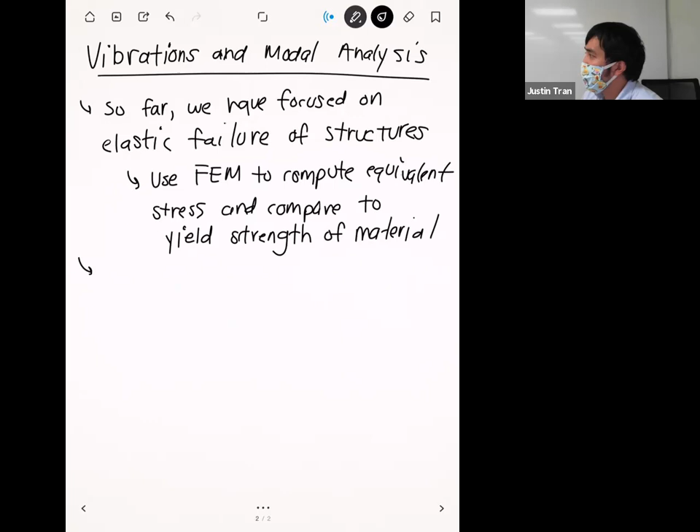And so we've done this in both a static configuration, which is what we've focused mostly on. We've also done a little bit of dynamics as well. Okay. But this isn't the only failure mode for a structure, right? A structure can fail in other ways beyond this. And so one of the ways where a structure can fail, which is a prime concern for any kind of structural design, is resonant vibrations. Okay.

Right. And so the whole idea with resonant vibrations is that every single object, if it has a physical form, has what's known as a natural frequency. Okay. If you take this natural frequency, and if you excite, what we typically call it, if you excite the structure at this natural frequency, okay.

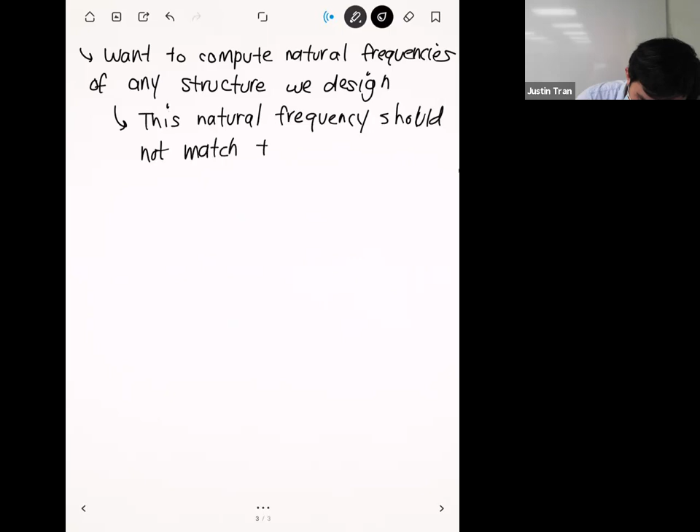Okay. And a lot of times, you're going to be able to compute the frequencies of your loadings fairly easily. As an example, let's say that you're designing a bridge, right? A bridge which is designed for people to walk over. And if you're going to have a fairly decent amount of foot traffic, one frequency that you can avoid designing around is the frequency at which people normally walk. Okay.

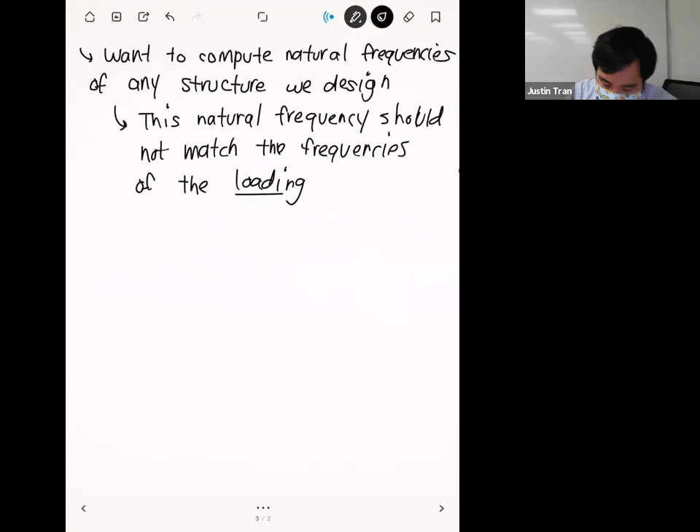So this is a very common one if you're designing any kind of structure. Okay. And so another example is the building that we're standing in right now, right? So people are going to be walking around this building quite a bit. Okay.

And so if you were the designer of this building, you want to make it so that if everyone was basically walking up and down the hall at a particular frequency, this should not match the natural frequency of your building. Okay. Because if you do, then the building is going to fall apart just by people walking up and down the hallway, which is what you don't want.

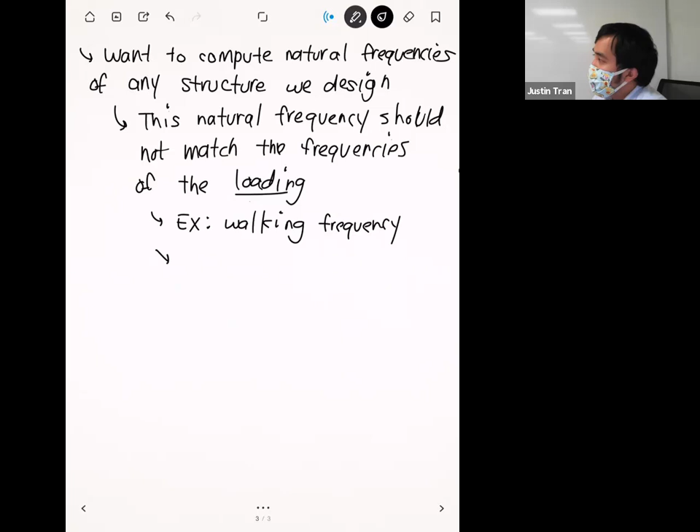Okay. Right. So typically, I say here that the natural frequency shouldn't match these loading frequencies, but in reality, the way that designers avoid this is they try to design their structure such that the natural frequencies are way higher than their loading frequencies. Okay.

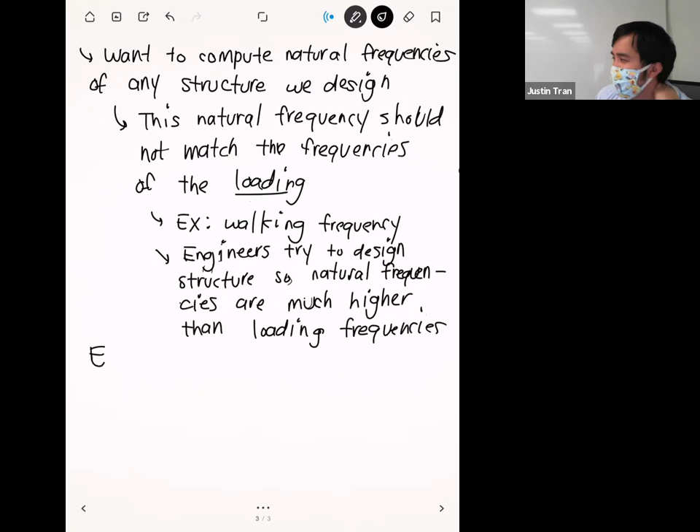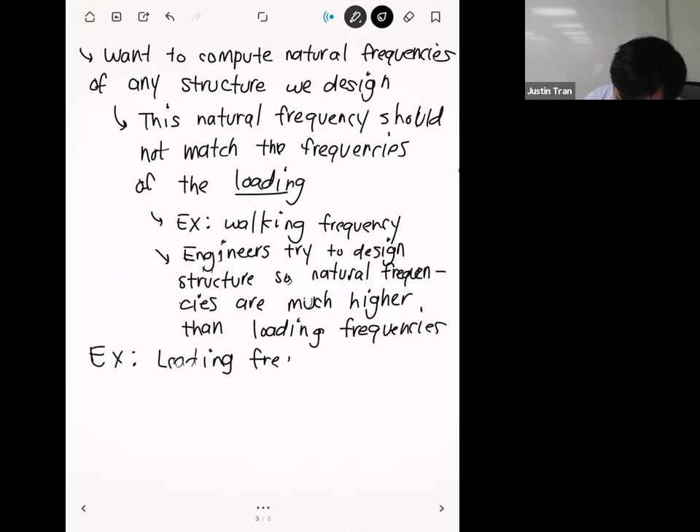And so let's say that the walking frequency is maybe around 2 hertz, okay? Average, because people walk at different paces, but on average, let's say that we have a frequency about 2 hertz, okay? Ideally, let's say that you're designing a building, and so the natural frequency of this building, I would say, has to be at least 10, okay?

Because obviously you don't want it to be 2, and you don't want it to be anywhere close to 2 as well, because things might happen where maybe someone runs down the hall and then they're stepping at a higher pace, okay? And so you don't want to be anywhere near that. And so there should be a decent factor of safety involved here to make sure that you're never going to be around that case. Okay.

All right. And so, of course, the key to this whole operation is being able to compute what the natural frequency of your structure is. Okay. But unfortunately, this is much easier said than done, because it depends on a lot of properties of your structure. It depends on its material, it depends on its geometry. To a certain degree, it also depends on its loading as well. And so this is normally not something that you can do by hand.

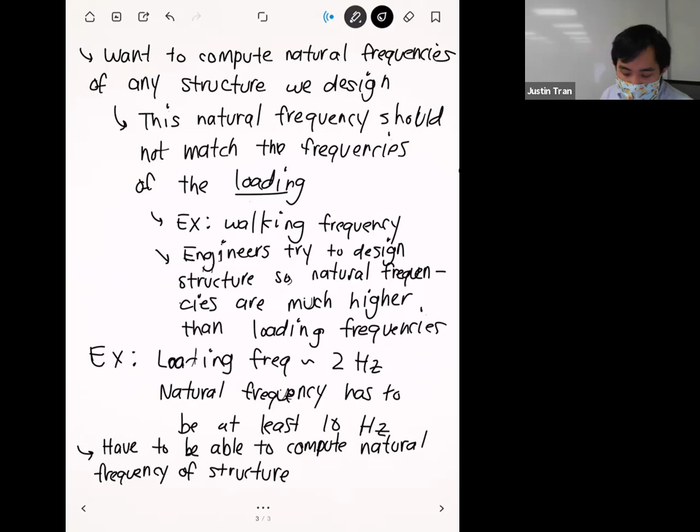Yeah. So if something like this is so difficult and challenging that we have to use computer software, how did they do it before? Did they just take weeks and weeks to get it done?

So before, even though it's hard, it's really hard to get an exact number. You can do some decent estimates based on whatever material you're using and the rough size of the building. A lot of times these numbers depend on certain critical dimensions, like what is the thickness of the wall at this location. And with lots of experience, they were able to get a good estimate. It wouldn't be exactly perfect, but usually good enough to do computations like this.

And they would do a lot more scale testing too. So they probably wouldn't build an entire big building, but they would make a small scale one and then test their designs that way too. Yeah.

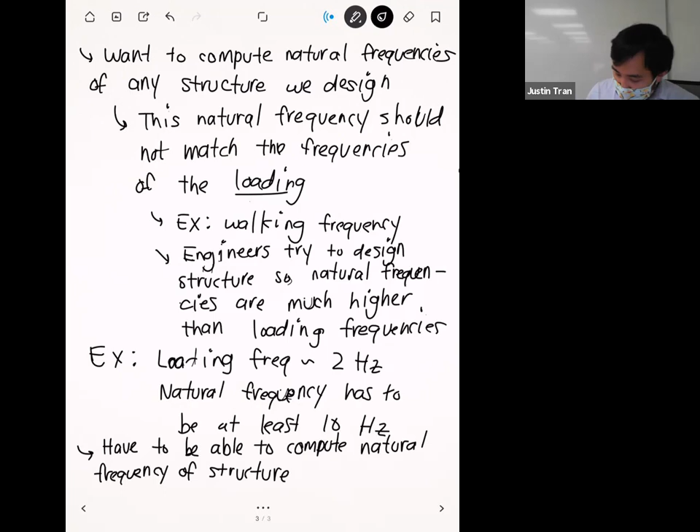Okay. All right. So let's talk about some of the theory behind resonance. Let's start with one of the simplest cases, which is a string in tension. All right. And so we're going to look at what is basically a guitar string. We have a string that's going to be fixed to a wall on one end.

And on the other end, we're going to be supplying a tensile force. Okay. And so the string is going to be pulled tight, right? So imagine exactly a guitar string. And in addition to the tension in the string, we also know its length. We'll say that the length is L. And we also know mu, which is its density, but it's given in terms of mass per length.

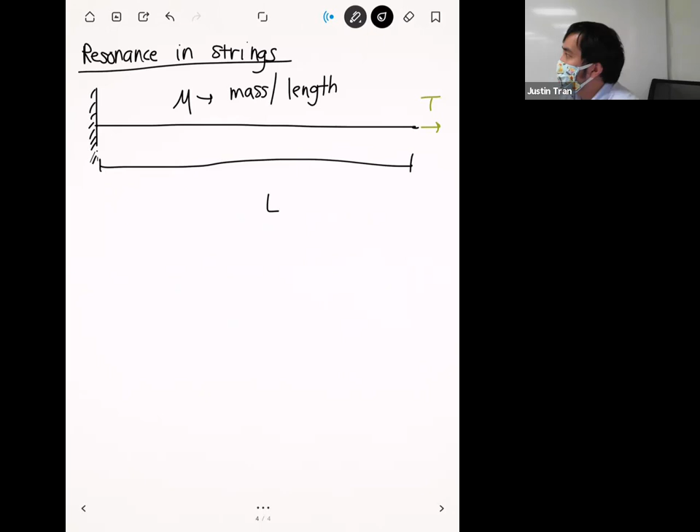And so basically we know what type of material the string is made out of, and we know what its mass is per unit length, okay? All right, and so given this information, we can compute the natural frequency in the string.

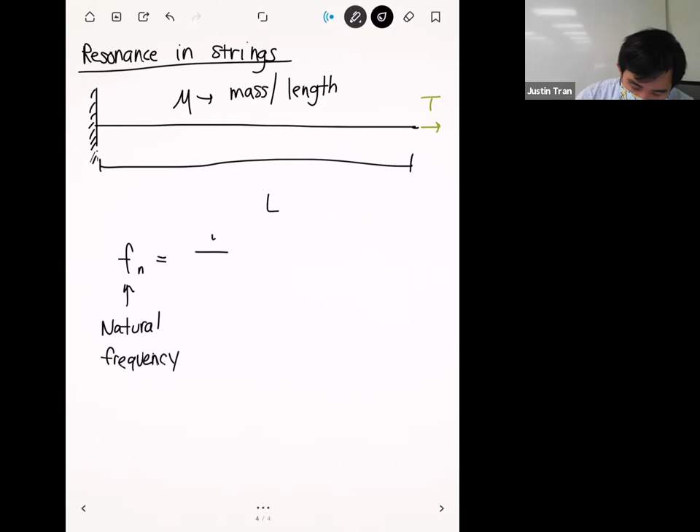Okay, and so the natural frequency in the string is going to be 1 divided by 2 times L times square root of T divided by mu. Okay. Right, and this would actually be the lowest natural frequency. So this is the one with the smallest value.

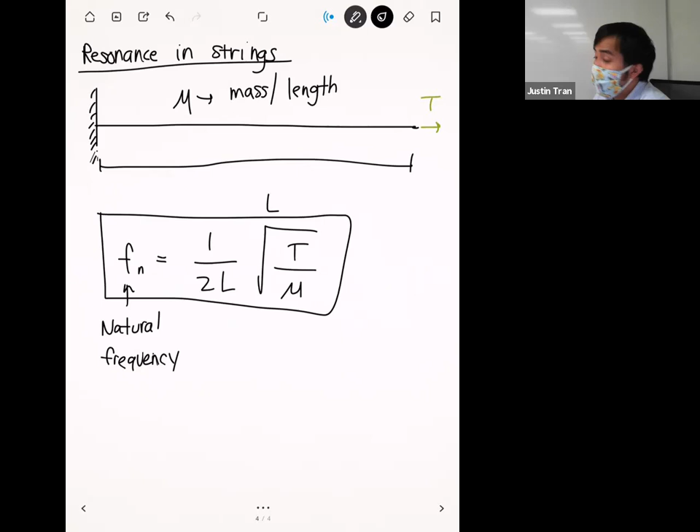Okay. And so let's take a look at this formula here. Even though it's fairly simple, we can actually glean a lot of information here that is important for understanding resonance in general, and what are some properties that we can look out for in our more complicated situations. In particular, I want to highlight these 3 parameters. So we have the length, we have the tension, and we have the mass per unit length. Let's go over each one individually, and let's extrapolate what they would really mean for a more complicated structure. So let's look at number 1.

Number 1, we have the length, right? The length here is a geometrical property. In fact, it's our only geometrical property. What this tells us is that the geometry of the structure affects what its natural frequency is. Whether your structure is really big or really small, has a lot of curves, not a lot of curves, has a lot of surface features, all of those things factor into what the natural frequency of the structure is going to be.

And in fact, what you see here is that the geometrical feature for this string is actually in the denominator, right? So if we have a longer string, if we increase L, that'll decrease the natural frequency of our string.

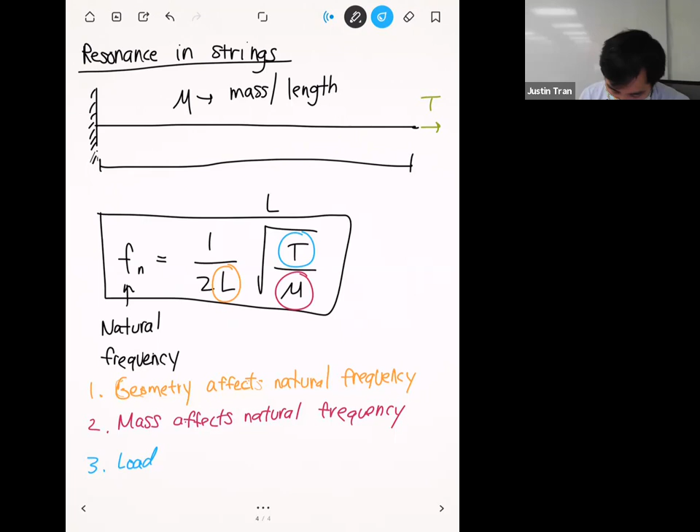Another name that we can call this load is the pre-stress. The state of stress within the structure also affects what its natural frequency is going to be. Another way that you can interpret this tension is that it's a measure of the stiffness in the structure. And we have another material property that has to do with stiffness, which is the Young's modulus.

And so this tension here kind of represents both. And so it's not the perfect representation of these, but it's a string. And so even though it's a simple string, we have these three quantities here, and they all fit into a certain category, okay? And unlike the other two, we see that the tension here is in the numerator, okay?

And so what this tells you is that the more pre-stress that you have, or the higher amounts of load that you have, or the higher stiffness that you have, this is going to make the natural frequency higher, okay? And so if you were designing a structure and your natural frequency is too low, which is the most common case in practice, what you can do is stiffen up the structure. So you can either change the material to be something stiffer, or you can add more pre-stress as well, and that's going to raise your natural frequency.

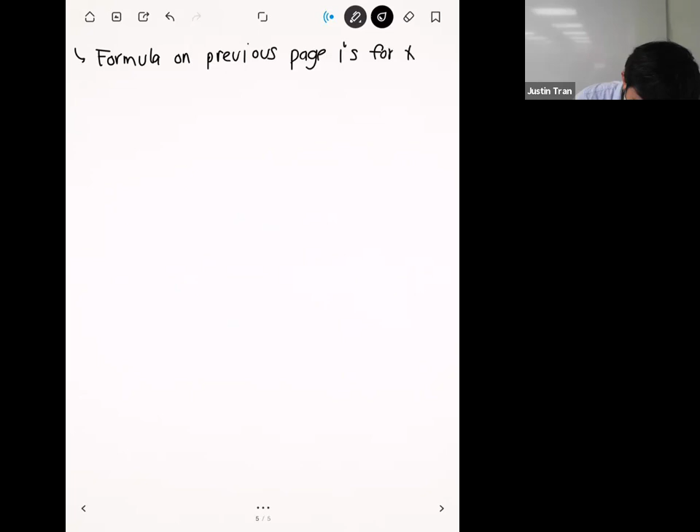And so the formula that I had on the previous page, this is for what's known as the lowest natural frequency. Okay. And so by that sentence right there, it implies that there's more than one natural frequency, and that would be correct, right?

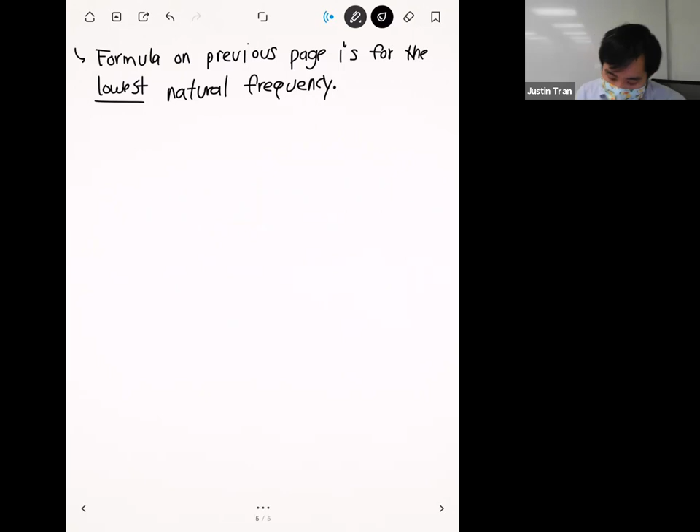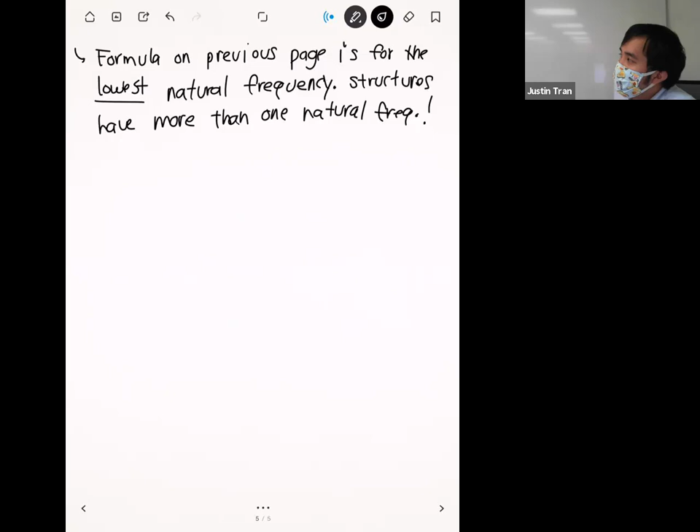Okay. And in fact, there's actually infinitely many. And so basically once you compute the lowest natural frequency, all of the integer multiples of that frequency are also a natural frequency. And so in theory, you can have infinity. But most of the time that's not really practical, because you can't excite something at like infinity hertz, right? I don't care if you're the Flash or something like that. So that's just not possible.

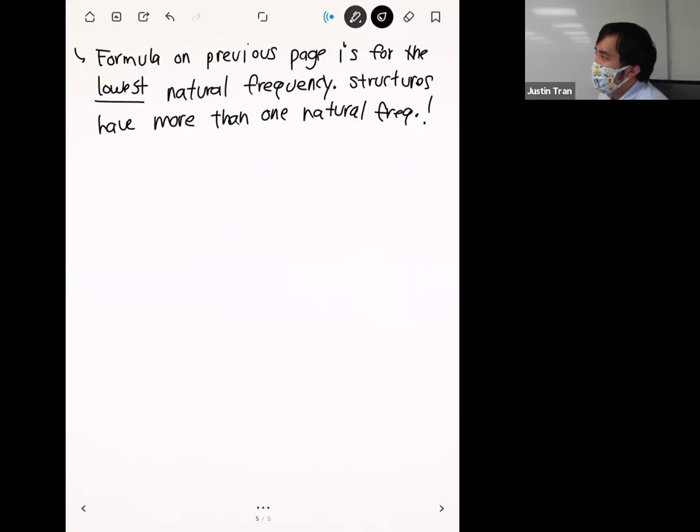Okay. And so most of the time, we're only really interested in the lowest one, or even the lowest two or three. But beyond that, those are kind of nice to look at, but we don't really care. Okay. And so the lowest one actually has a special name. This is often called the first harmonic mode. Okay. And so if you excite the string at this frequency, you can actually view a very specific deformation pattern. Okay.

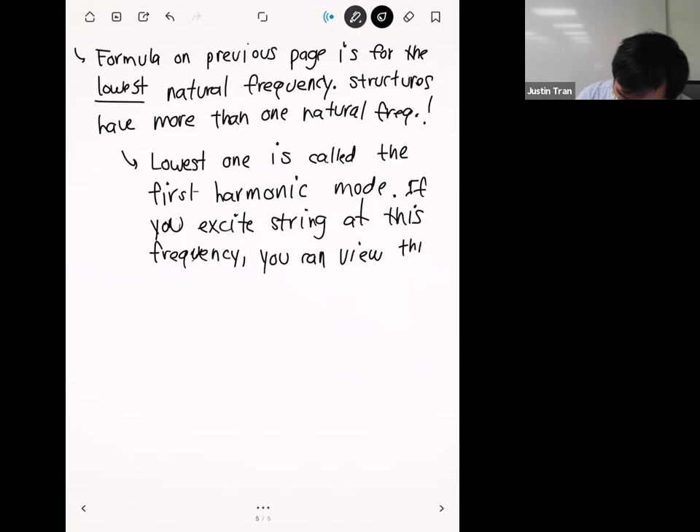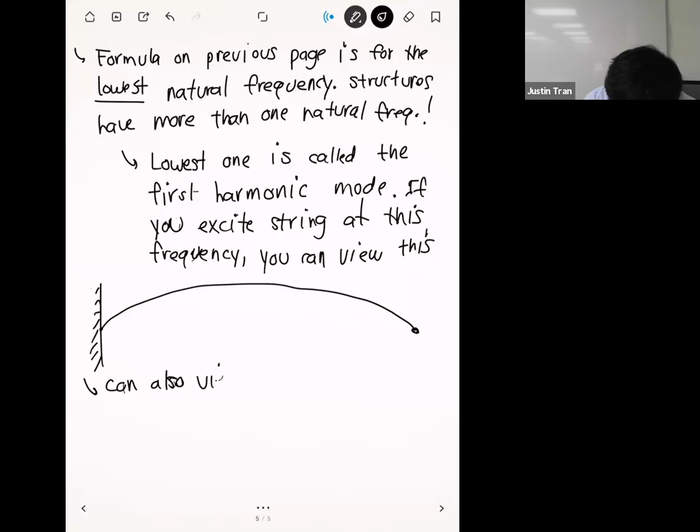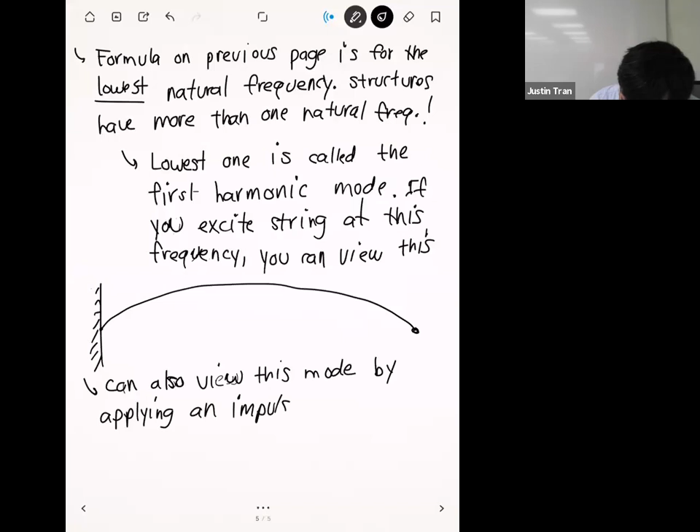Okay. And so in fact, the first harmonic mode for a string looks something like this. You just have one big hump that goes throughout the entire string. Okay. All right. Another way that you can view this mode is to apply an impulse loading, okay? And so what that means is that you apply loading for just a brief second, and then you just let it vibrate on its own, okay?

And so this would be exactly the same as if you took a guitar string and you just pluck it, right? If you have a guitar at home, I would highly encourage you to test this out. Or you can YouTube it. You can YouTube almost anything nowadays.

And so if you pluck a guitar string, what you'll see is that the string stays vibrating for a little bit, right? And the mode of the vibration, if you look at it carefully, of course it's going to be going really fast, so it's going to be vibrating kind of like this. But the overall shape of the mode is going to look something like this, because that's the most dominant frequency that shows up. Okay, and so that's another way that you can view this mode.

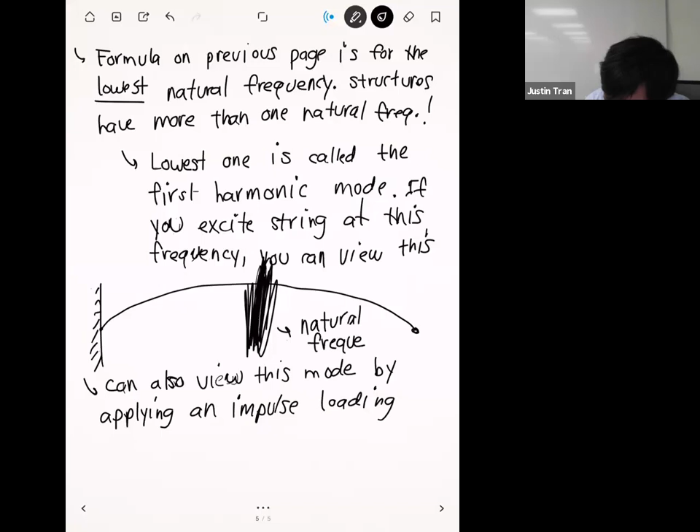Okay, and of course the frequency at which it's vibrating, right? If you pluck it and you let it go, the frequency at which it's vibrating is going to be exactly the same as the natural frequency. Okay. All right. And so that's the connection between natural frequencies and the corresponding response. Okay. And so if you took the string and you vibrated it at this natural frequency, okay.

And so let's say that you're an opera singer and you can look at a string and sing at this natural frequency. What you'll see is that the string will actually start to vibrate with that mode as well. And if you sing loud enough and long enough, then the string will actually snap, because these vibrations are going to get higher and higher. It's going to look the same, it's going to have the same mode. It's just the amplitude is going to get higher and higher until the string can no longer sustain this, and then it just snaps. Okay.

Right. And so usually, most of the time we're going to be concerned with the first harmonic mode, because that's kind of the lowest frequency that you can excite it at to get resonance. And usually if you're designing a structure, that's going to be the one that's going to cause your structure to fail. But there are other modes as well, and we'll discuss that briefly on the next page. Okay. All right. Any questions on this? Okay.

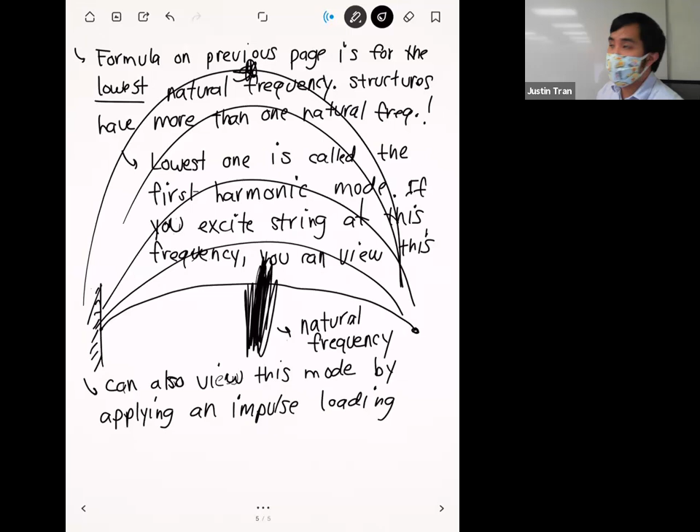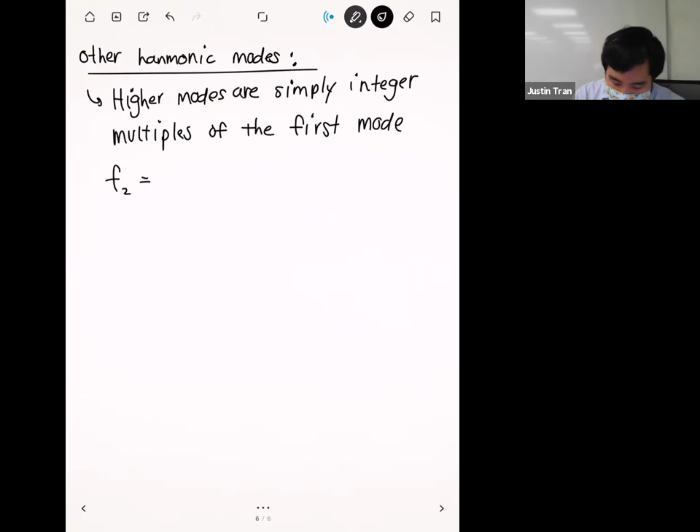All right, so let's discuss some of the other harmonic modes that are out there. Okay. And so, like I mentioned, the other harmonic modes are integer multiples of the first harmonic mode. Okay. And so if we call the second mode F2, we'll call that 2 times Fn, okay? Where Fn, remember, was our first harmonic mode, okay?

And then F3, which is the third harmonic mode, is going to be just 3 times that first one as well, okay? And the mode shapes are going to be different for these as well, okay? And so let's look at F2 first, right? And so F2 might look something like this. Okay. Not might, it actually does look like that. Okay. So this is F2. And of course, I'm exaggerating these. Normally it does not go this high. Okay.

Okay. And F3 might look something like that. And so, for the strings case, it's very elegant in that the number of whichever mode that you're looking at also matches the number of bumps that you see. Okay. But that's what you can kind of expect to see, right?

And so when we do our activity in ANSYS, what you'll see is that ANSYS will compute, let's say, the first 6 harmonic modes for your structure, and you can actually have ANSYS show you what this resonant mode actually looks like. And so, once you compute the resonant modes, you can tell ANSYS to show me what the deformation looks like, and it'll give you a deformation plot which shows you what those modes are. Okay. All right. Any questions on this?

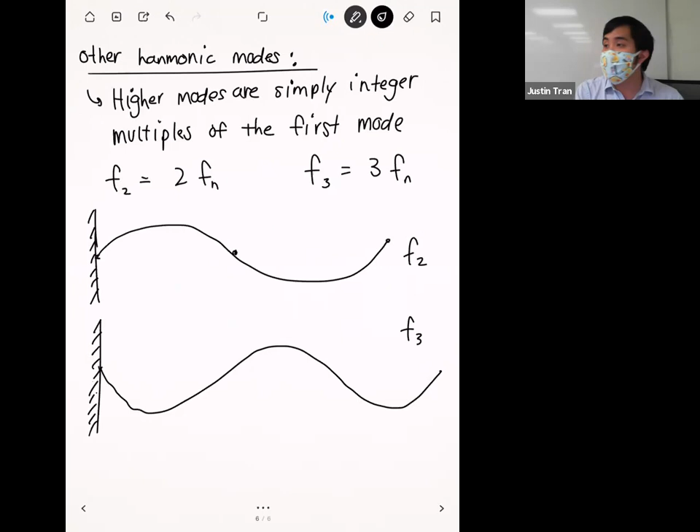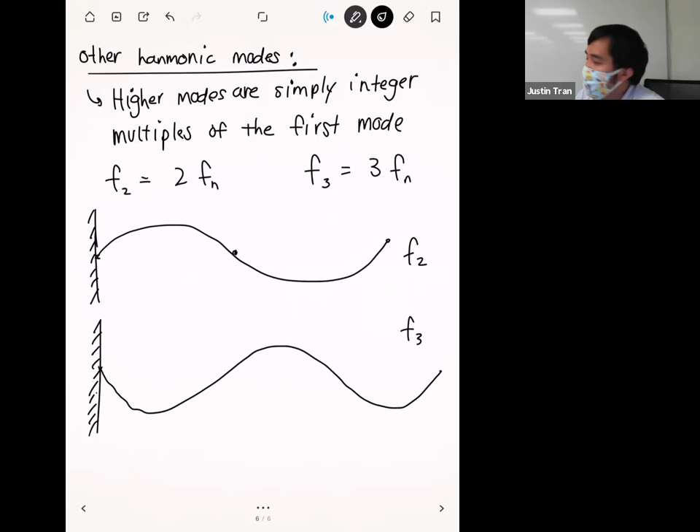Okay. All right, and so that's the simplest case that you can do in 1D. Okay. The situation, of course, gets a little bit more complicated when you add extra dimensions. Okay. And so for complex structures, what you'll see, and you'll see this in the activity on Wednesday as well, is that some of the higher modes won't actually be integer multiples of the first one. Okay.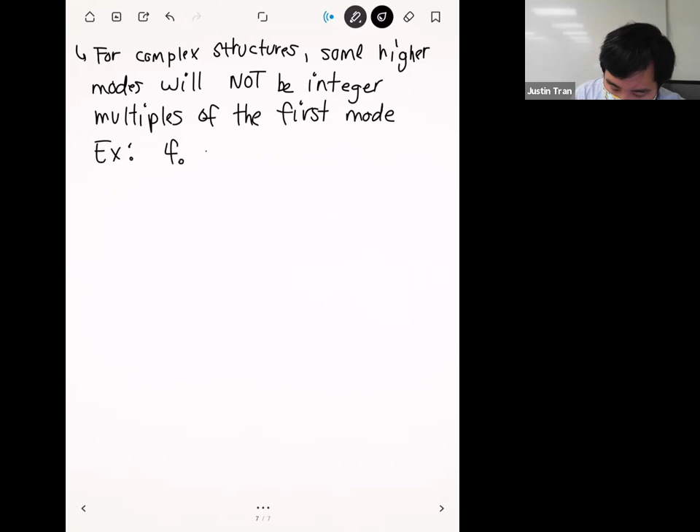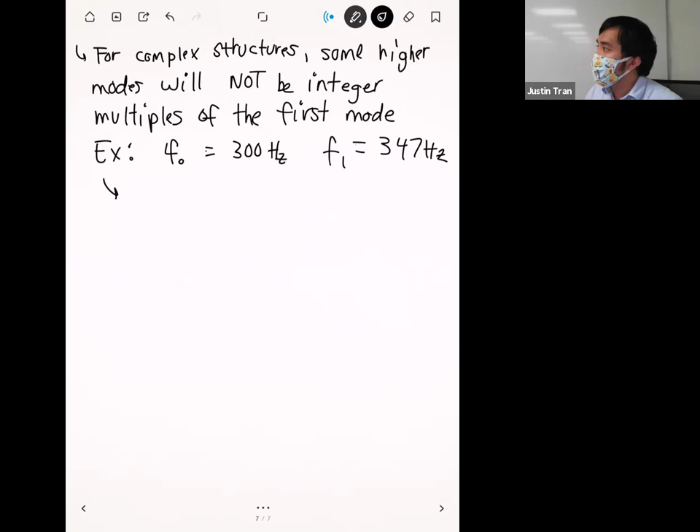Okay. And so, let's say that our first mode here will be, let's say, 300 Hertz. Okay. What you'll see is that the next mode might be something like 347. Okay. And you'll be looking at that and you'll be thinking, what the heck, 347 is not 2 times 300, right? And so what's going on here? What's going on here is that for complex structures, you can have different resonant frequencies or different natural frequencies in different directions of the structure.

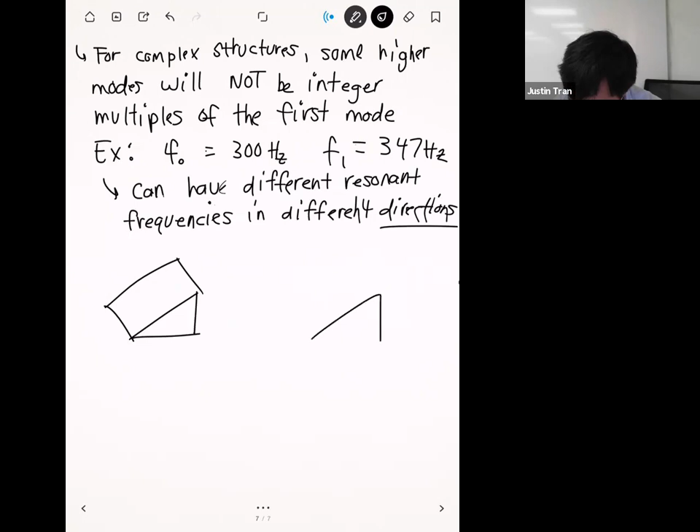Okay. And so, if we take a very simple case, let's say that we have a triangular block. Okay. And so, our first natural frequency might be in this direction right here. Okay. And let's say that this is the frequency that's around 300 Hertz, right? We might also have another natural frequency in this direction right here. Okay. And that one's going to be independent of the first one because it's not acting in the same direction, because it's a natural frequency or a mode that's deforming in that direction. Okay. This one might be something like 347, which is not an integer multiple of that one.

Okay. But what you'll see is that each of these directions here kind of has its own family tree. And so if we look at the next resonant frequency in this horizontal direction, okay, then what you'll see is that this one will be 600, okay? Because it's in the exact same direction. And so it's just an integer multiple of the previous one. Okay. All right. All right. Any questions on this?

All right. Okay. And so, that's kind of what resonance is in general. And so let's talk about what this means for ANSYS, what you can find in ANSYS, and what engineers are typically interested in finding. Okay.

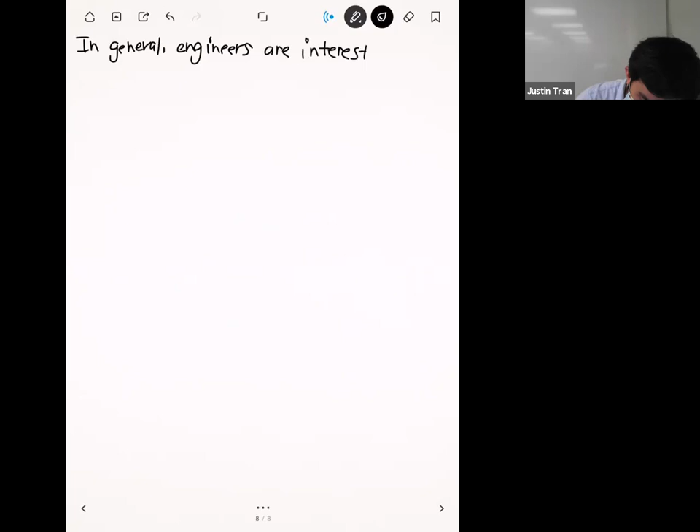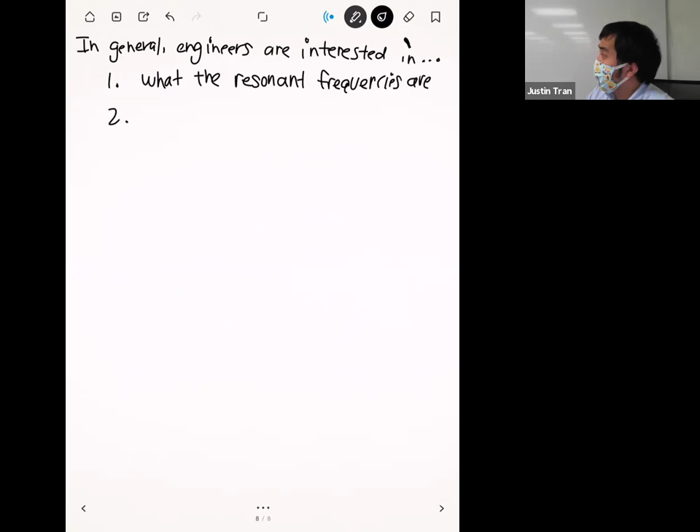And so if an engineer is going to sit down and do vibration analysis, they're primarily interested in two things. Number one, they're interested in what the resonant frequencies are. So that's the first one that they're concerned about. And number two, what they're interested in is, if we were to excite this structure at certain frequencies, what is the magnitude or the amplitude of the vibrations that occur.

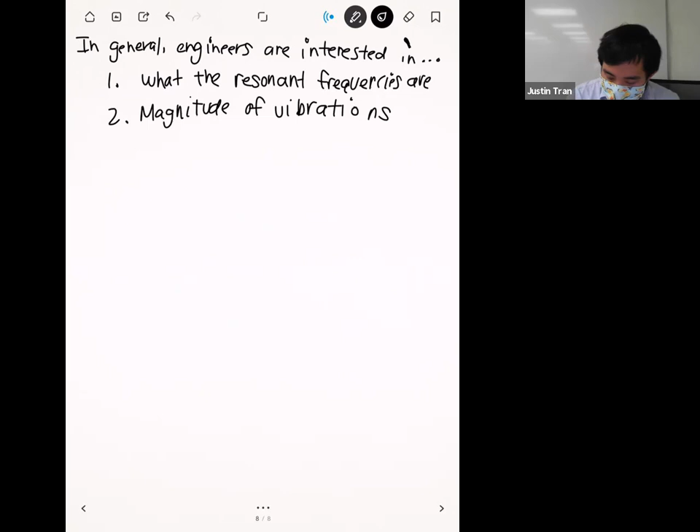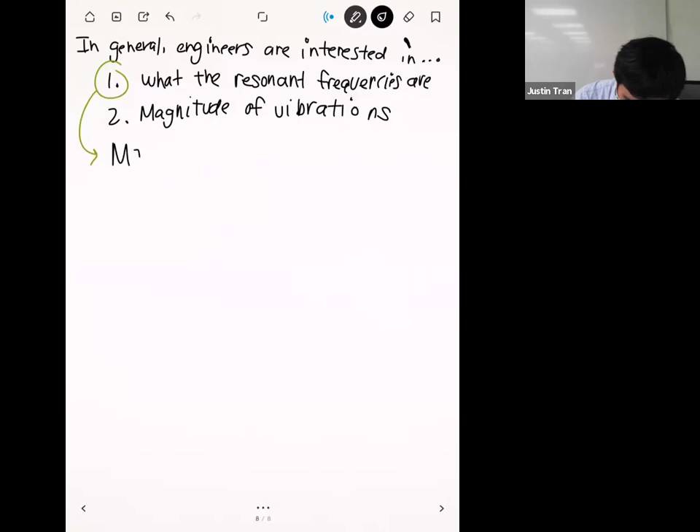All right. And so thankfully, ANSYS has tools that can do both of these things, and they're going to be basically the subject of our activity. So let's go over point number 1 first. For point number 1, ANSYS has a tool called modal analysis. And so modal analysis is a tool that can find all of the resonant frequencies for a given structure.

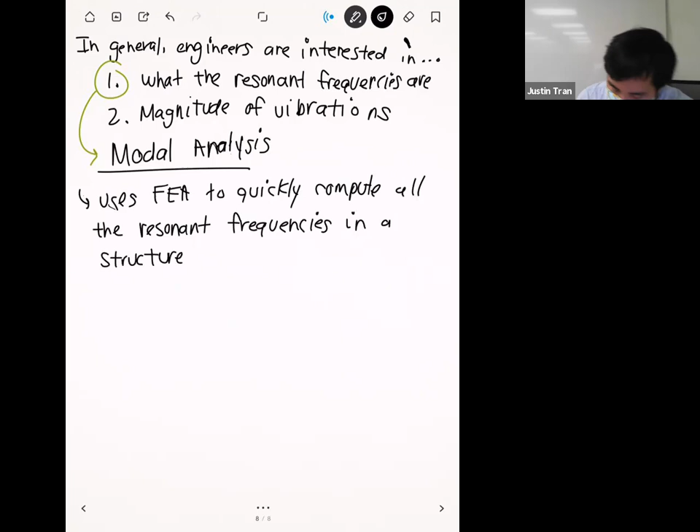And so this tool is going to basically take the geometry into account. It's going to take the material properties, any kind of pre-stressing that you might be applying, into account too. So you feed all that in, and it's going to spit out what the natural frequencies are. And it actually happens pretty quickly too, so this is not an expensive analysis at all.

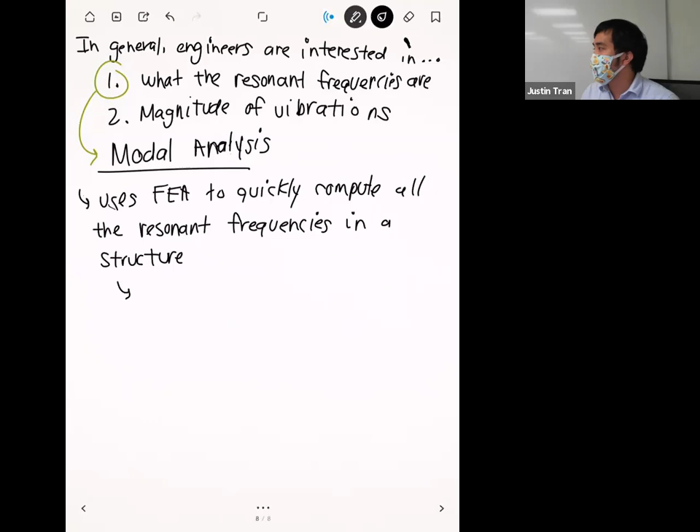And so you actually don't even need to apply loads on this. You can do what's called a stress-free modal analysis, where the only thing you have to do is fix it in place. So the only requirement really is a fixed support. Although generally it's more realistic if you do apply the loads, that's not a requirement. As long as you fix it in space and you prevent any kind of rigid body motion, then you can perform modal analysis.

But if you do decide to put any kind of external loads on the structure, this is going to add to the pre-stress of the structure. And so it's going to make your natural frequencies a little bit more accurate, a little bit more faithful to what it is in reality. Because if your structure is going to be subjected to some static loads, you want to account for that. But most of the time, the pre-stress is going to be fairly negligible.

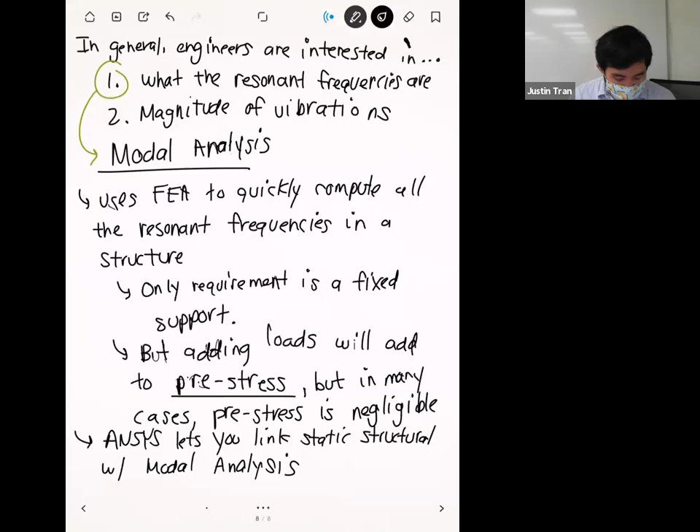And so if you do that, this is going to automatically import the mesh. It's also going to automatically import your boundary conditions, so you don't have to re-add those in, and you can just work from there. That's really convenient because you can set up a static structural simulation and then directly link it to a modal one. And then you just hit solve and it'll compute your natural frequencies just from that. All right. Any questions on this?

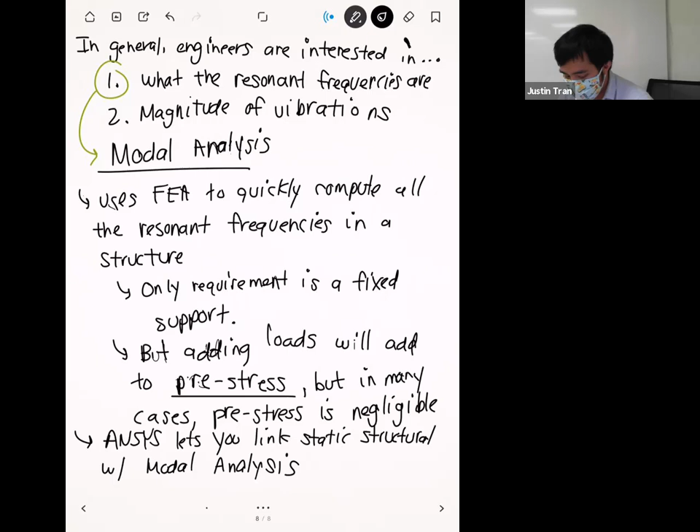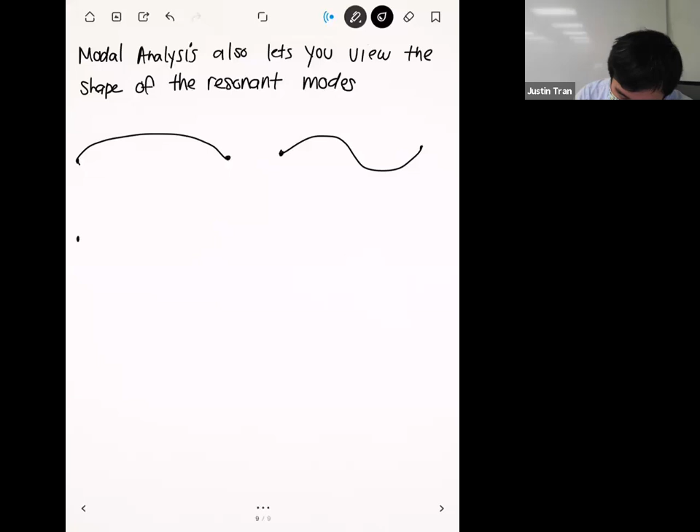Okay. And so another nice feature of the modal analysis in ANSYS is that it actually lets you view the shape of the resonant modes. So if you were to do a simulation on a string, after the modal analysis you can tell ANSYS, show me the first mode, show me the second mode, show me the third one, the fourth one. And so you can actually see, if you were to excite the structure at those frequencies, what the mode would actually look like.

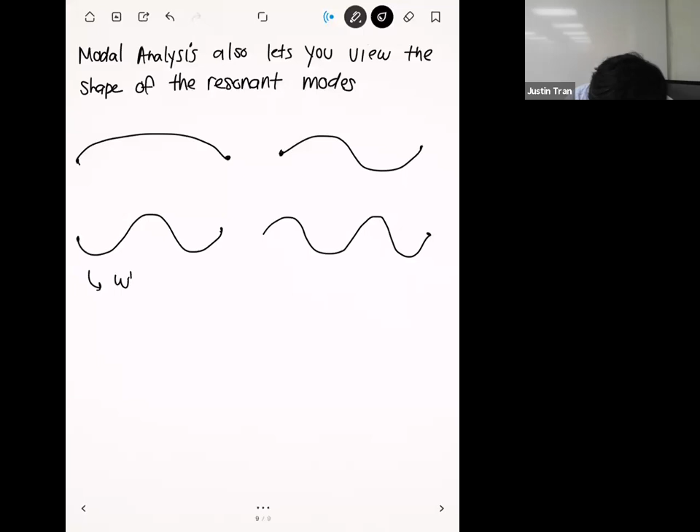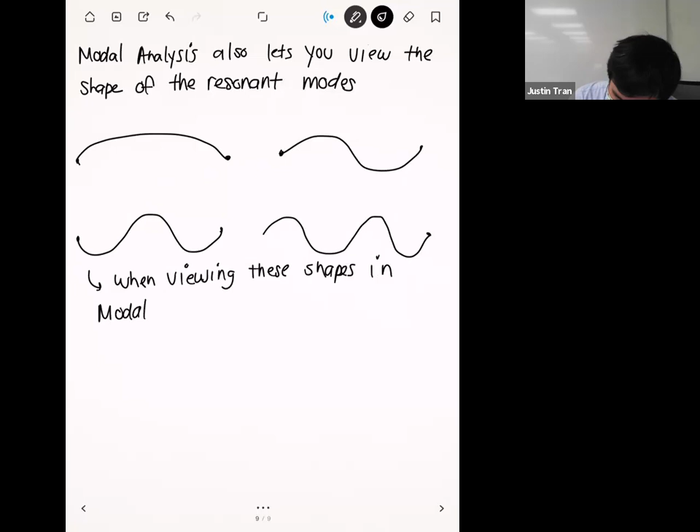Okay. Right. I do want to make one really big word of caution here, and even though I'm saying this, and I'll repeat this on Wednesday too, someone is always going to ask about this. Okay? So when you view these modes in modal analysis, just for illustration purposes, or just for visualizing purposes, ANSYS will tell you that the magnitude of this deformation here might be like 1 millimeter or something like that. Okay. So it'll actually have some numbers in there. It'll actually have some units.

Okay. What I'm going to tell you is to not trust those units at all. Those units are actually meaningless. Okay. So don't put any stock into those actual numbers. Don't take a modal analysis and say, if I sing at this gearbox at 300 hertz, then it's going to have exactly 12.443 millimeters of deformation. It's not like that at all. The only reason ANSYS puts numbers there is to help you illustrate what those shapes look like. Okay.

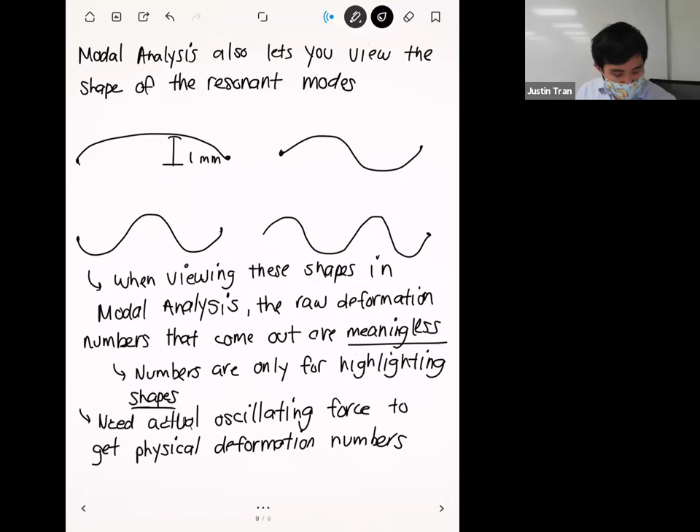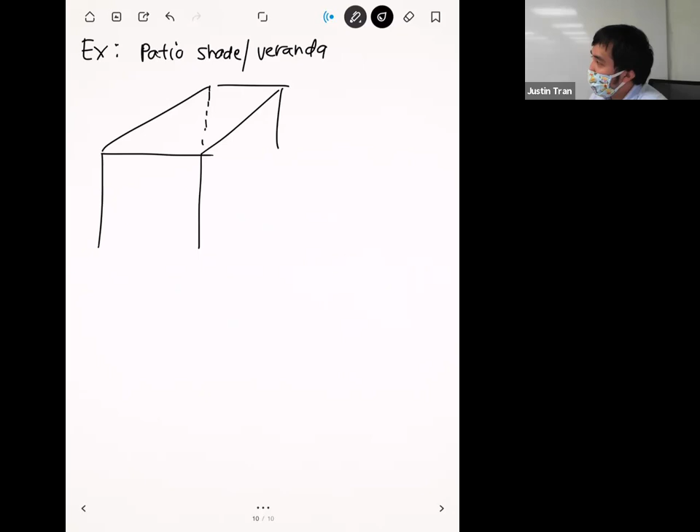Okay. All right. So I'll give you one quick example of this. Let's say that you're designing like a patio or a veranda or like a gazebo for a backyard. Okay. Or a veranda. And let's say that your shade looks something like this. Okay. So it's a simple covering that gives you some shade. And let's say that the engineer designing this fixes it here, fixes it here, fixes it here, fixes it here.

Okay. And let's say that the engineer designing this finds out that the resonant frequency or the natural frequency of the structure is really low, right? He did a modal analysis and he found the natural frequency is maybe around 6-7 hertz. And the wind that's going to be blowing on this thing is going to produce frequencies that are in that range. Okay.

So this might be a situation where, from a static point of view, this veranda might be structurally strong, right? Let's say that he applied a wind pressure, maybe some fat bird sitting on it or something, and the veranda holds its weight, so it's not going to fall. But once he performed a modal analysis, he said that this veranda is not going to fail in a plastic kind of way, but it will experience resonance if I don't do something about it.

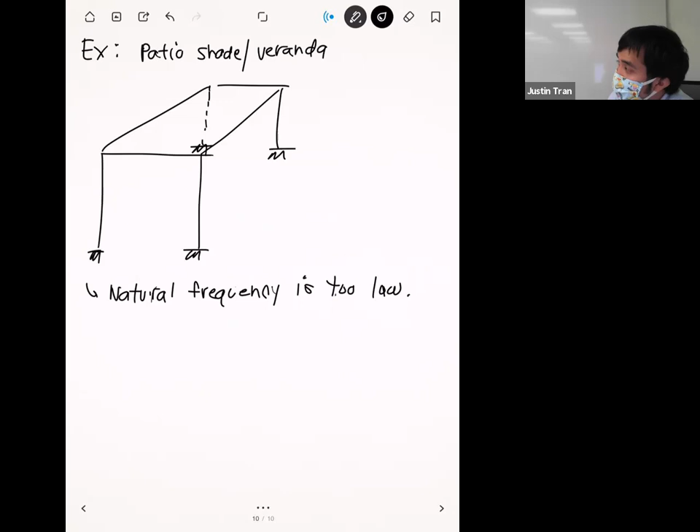Okay. All right. So from the modal analysis, what you can say is, I want to increase the strength of the structure. I want to increase this natural frequency. So let me increase the stiffness.

Okay. And so let's say that he's going to add some crossbars here. Let's say that he added a bar just like that, and maybe a bar just like that as well. And maybe for good measure, he added X's too. All right. And so he modified his geometry where he added these X's, and then he reran his modal analysis, and he found that, hey, my natural frequency went up, and so now I'm good.

And so this is, oops, how did that happen? I didn't even touch my iPad.

And so, this is one example where you take the results of a modal analysis and use them to design your structure for the better. All right. Any questions on this? Okay. All right. And so that's modal analysis. And so that's what we're going to spend most of our time with in the activity on Wednesday.

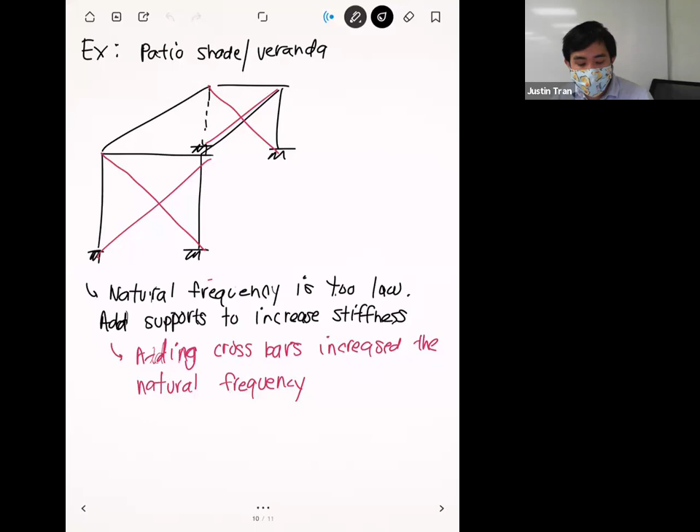But there are other tools that you can use in ANSYS to do vibration analysis. And one of the interesting tools that are available to you is called harmonic response analysis. Right. So harmonic response analysis will answer the question that we had before, is that, now that we know what the natural frequencies are, how bad are the vibrations going to get, or what is the magnitude of the vibrations that are going to occur on the structure.

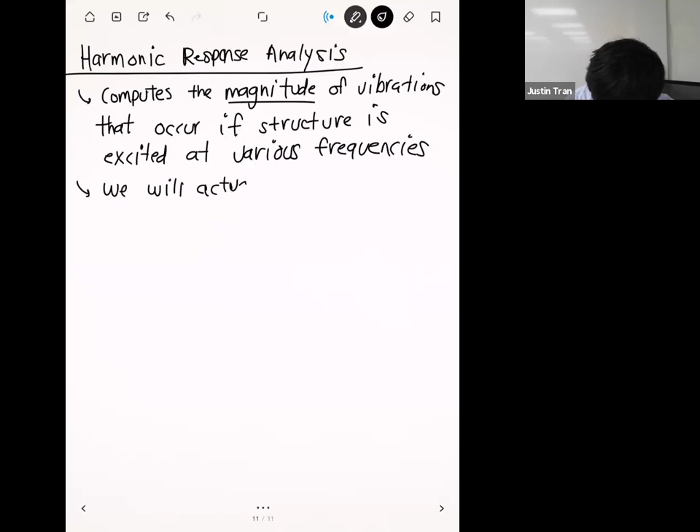Okay. And so this is another kind of tool that ANSYS has in its toolbox that lets you do vibration analysis. And so the big difference between harmonic response and modal analysis is that in this case, we're actually going to apply an oscillating load. And the main thing that we're going to have to specify here is what is the magnitude of this forcing that we're going to apply.

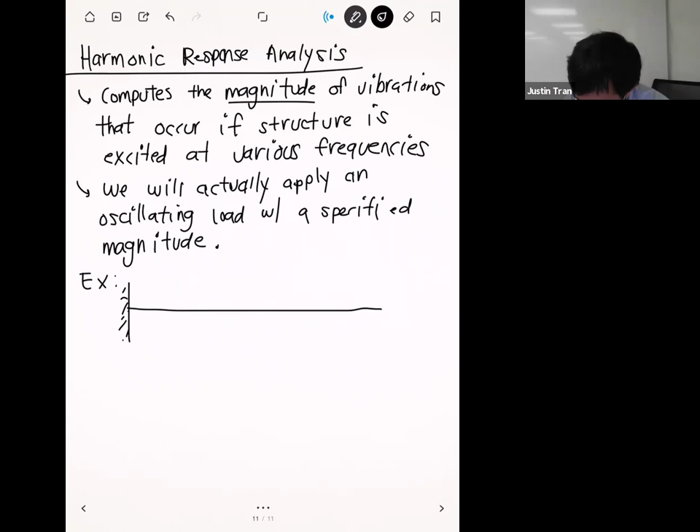All right. And so to give you an example, let's say that we have our string attached to a wall again. And so let's say that on one side of the string, we're holding it. Let's do the super long arms. So let's say that this person is holding the string on this side. He also has like General Grievous over here. Okay. So let's say he only has two arms.

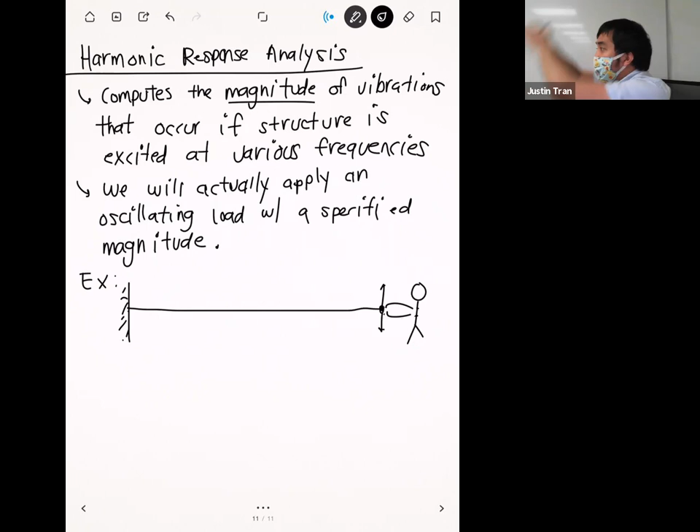And so he's holding the string and, first of all, he's going to choose how quickly he's going to pull the string up and down. But more importantly than the frequency, he's going to choose how high he's going to move it up and down. Right. And so that's what you're going to have to apply in the harmonic response. And as a result of this harmonic loading or this oscillating load, the structure, which is the string in this case, is going to vibrate.

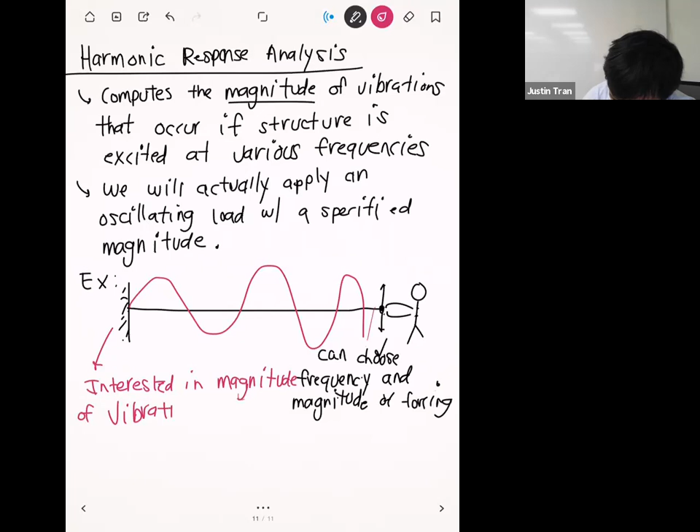And so what we can compute in harmonic response analysis is the magnitude of that vibration response. Because a lot of times, the magnitude of the response is going to be different, sometimes higher, sometimes lower than the magnitude of the forcing. And so I think it's easy to look at the situation and say that this person is oscillating up and down with a certain frequency and magnitude, and get sucked into the logic that the structure is also going to oscillate with that frequency and magnitude as well.

But the thing with resonance is that if you excite the structure at the resonant frequency, then the magnitudes of the deformations can actually be much higher than the magnitudes of the force. And that's exactly what you can view from the harmonic response analysis. All right, any questions on this so far?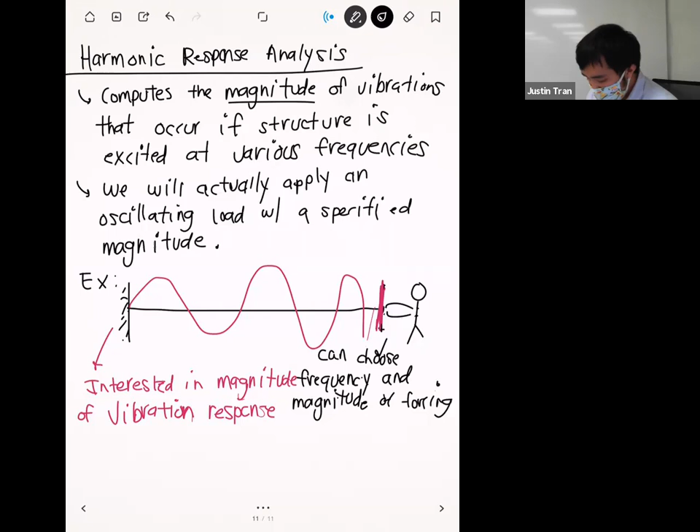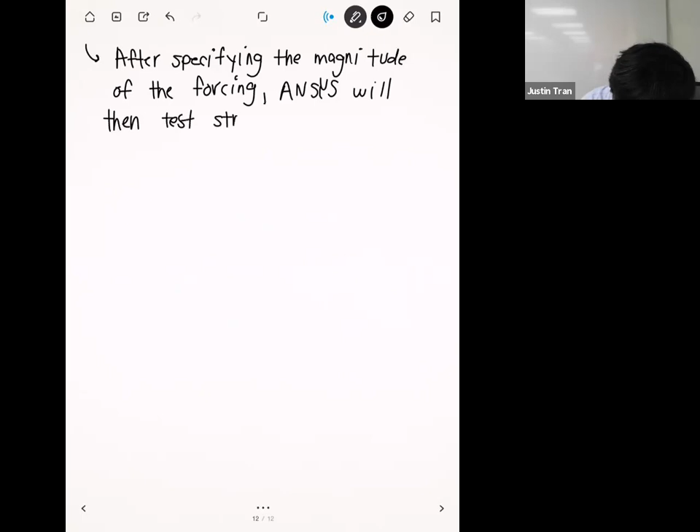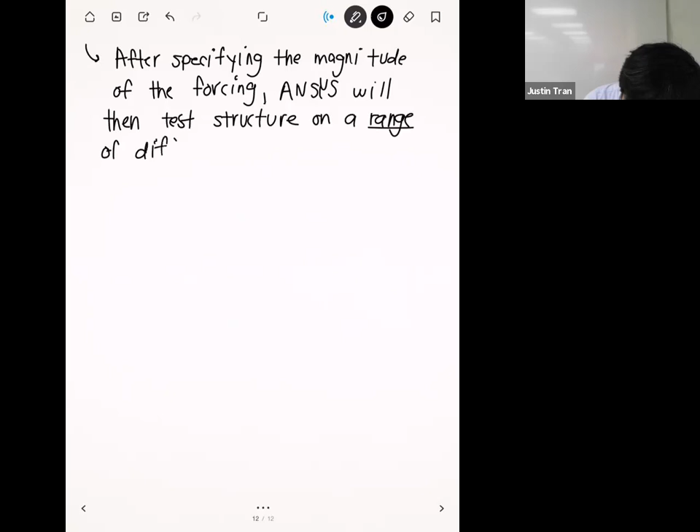Okay. And so after you supply the magnitude of the forcing, ANSYS is actually going to test out this loading not on just one frequency, but on a range of different frequencies. And then for each of those frequencies, ANSYS is going to measure what the magnitude of the resulting vibration is going to be.

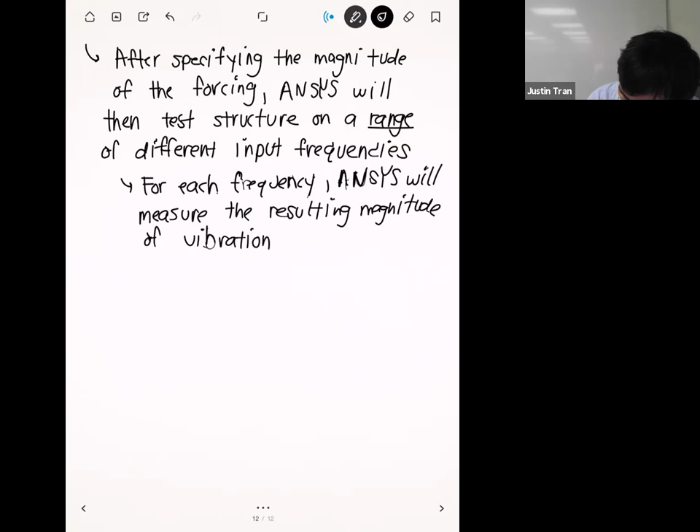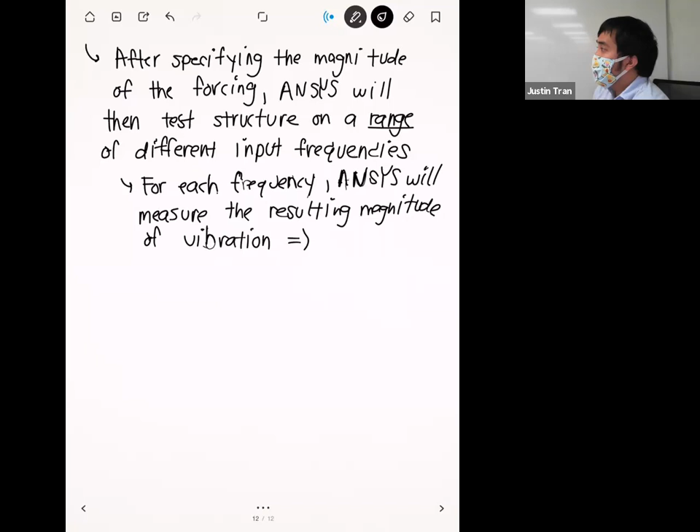And so for basically each of those frequencies, you're going to get a magnitude of the vibration. And the way that ANSYS basically shows this data is through a plot known as a spectrum plot. If you've never seen a spectrum plot, it looks something like this.

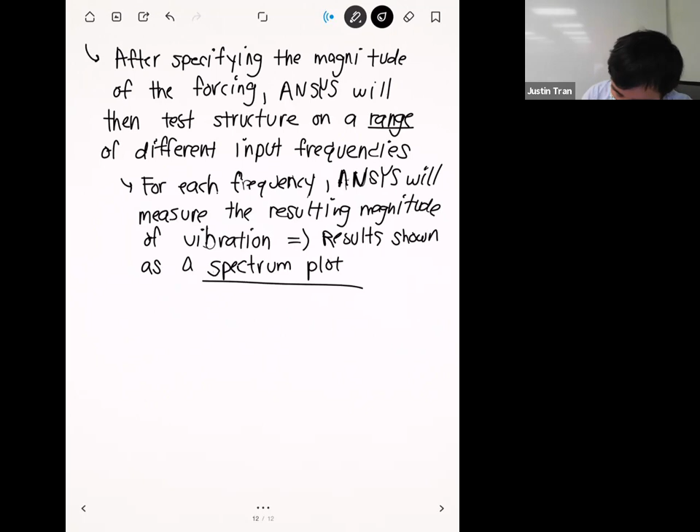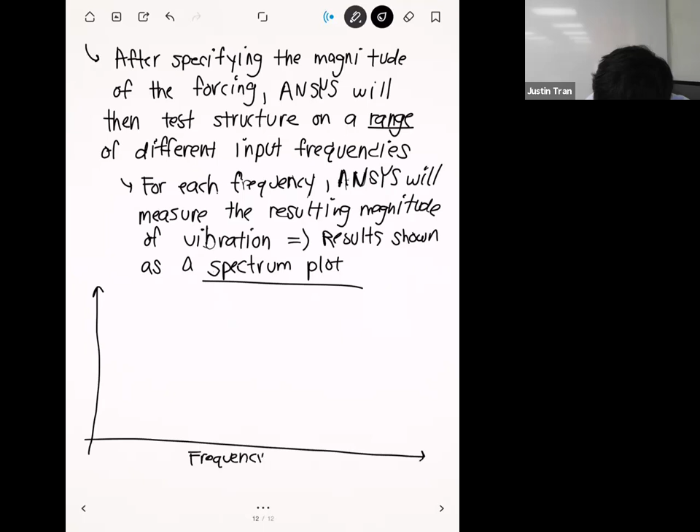On the x-axis here, we have the frequency, which usually has some units of hertz. And on the y-axis right here, we have the magnitude of the vibrations, which from now I'm just going to label as deformations. All right, and so a typical spectrum plot might look something like this.

And so you're going to see a plot where basically you have these very well-defined peaks, where these peaks are going to be your natural frequencies.

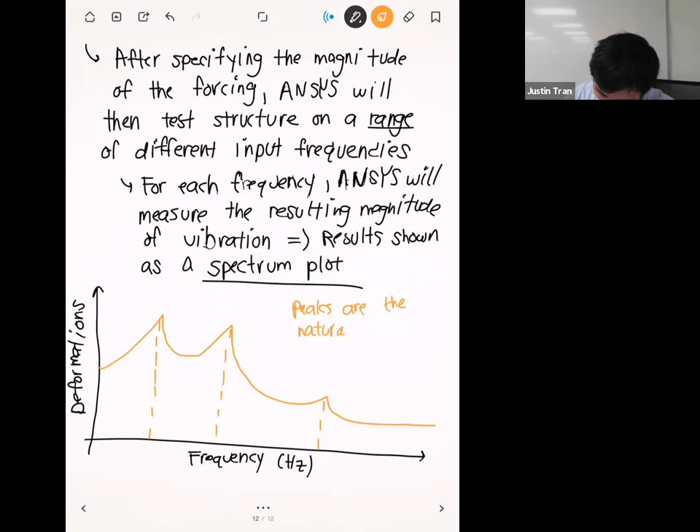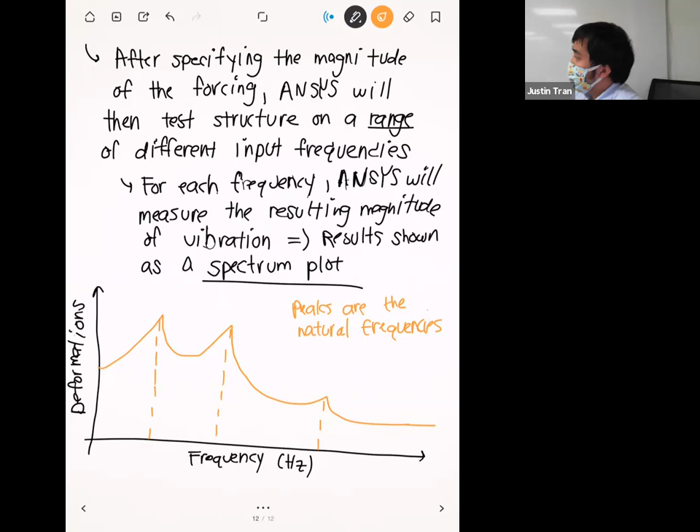So ideally, for this first natural frequency, remember, we want it to be much higher than the actual frequency of the loading. So in most situations, you want to operate in a range over here, this boxed area, which is the frequency of your typical loading.

Remember, you want your typical loading frequency to be much lower than your natural one. Otherwise, what if my loading frequency is over here? Here you're playing a bit of a dangerous game, because you typically don't want to be in between the peaks. You want to be in a region before a peak even occurs. So you want to be where the box is, not where the circle is.

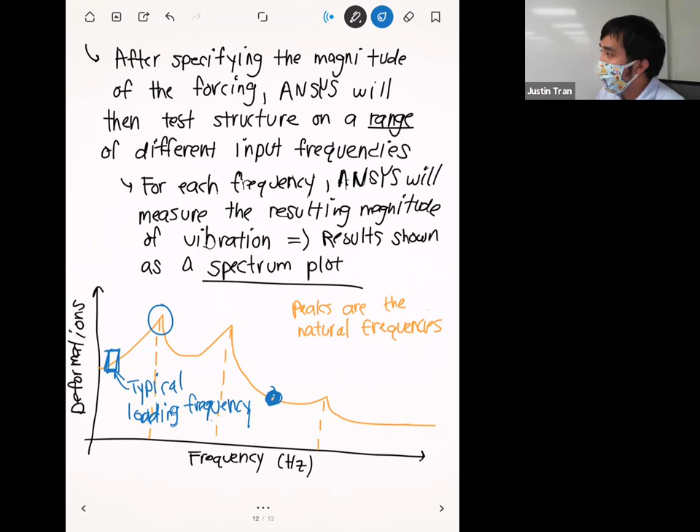Any questions on this before we wrap it up for today? Okay, so that's all I got. I did end up being a little bit early, but that's okay. There's not too much to say about modal analysis and vibrations. On Wednesday, when we meet next time, we'll see all this put into action in ANSYS, and we're going to do our activity.